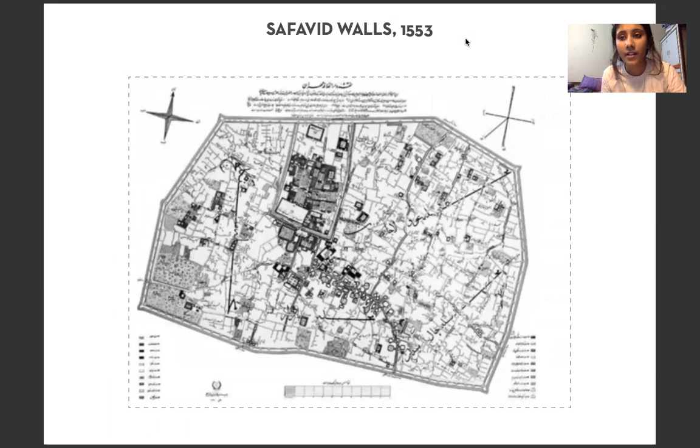Beginning with the Safavid walls of the 1500s, here the birth of the city took place, and it formed a medieval urban form kind of scenario, as we can see in the plan.

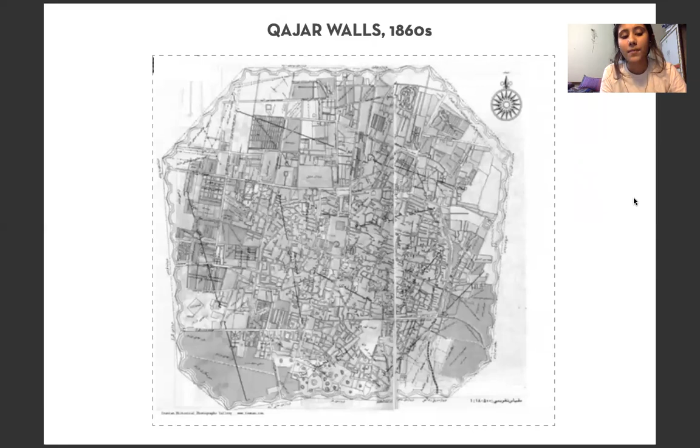Moving on to the Qajar walls, this was the time the expansion of the city took place from all sides. This began the formation of new wide streets and geometrical walls.

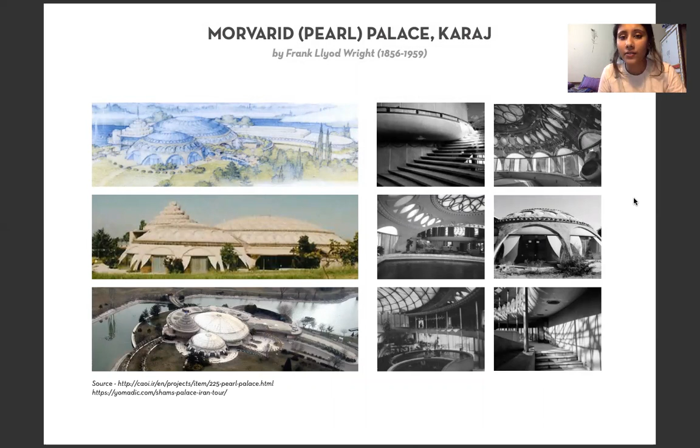The Morvarid, or Pearl Palace, in Karaj was made by Frank Lloyd Wright and is a classic example of contemporary architecture in Tehran. Following that, the Villa Namazee was made by a very famous Italian architect of that time, Giovanni Ponti, along with Fausto Melotti and Paolo De Poli.

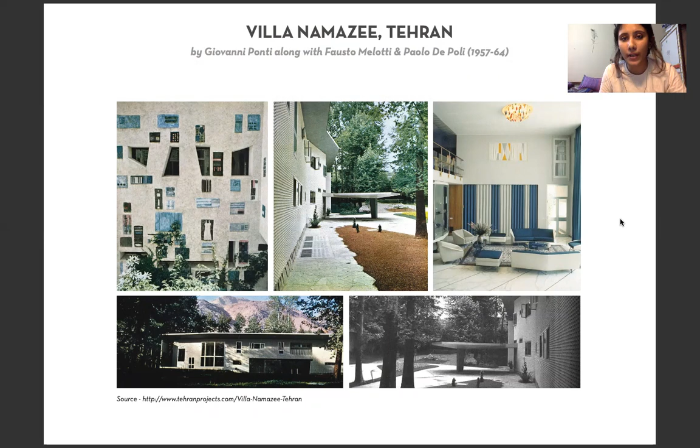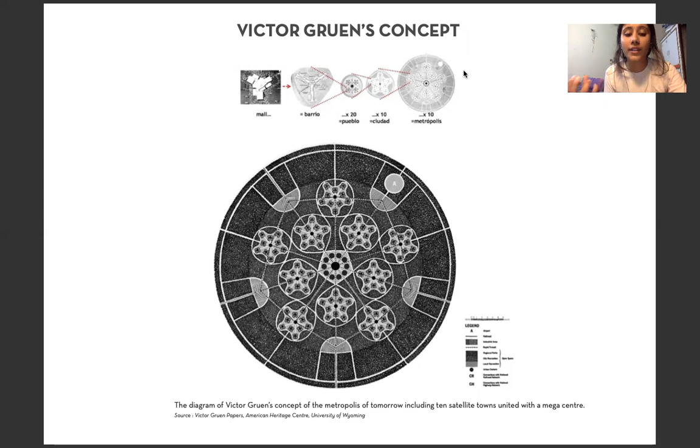Victor Gruen's concept. In 1964, the members of Plan Organization approached Farmanfarmaian and Victor Gruen to make a comprehensive plan, the first ever comprehensive plan for Tehran. As we know, Gruen is an Austrian American planner known as the father of shopping malls. His concept for Tehran's plan emerged from the same idea, from a shopping mall to a metropolis. The process was very similar to American post-war planning debates, which focused on resolving urban problems through decentralization and reorganization of the living space. These are again the 5 alternatives that Gruen and Farmanfarmaian proposed for Tehran's urban pattern.

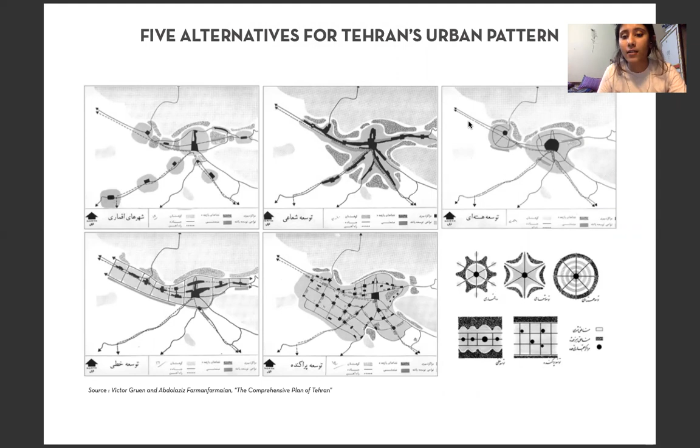Here shown is the diagram of a linear urban structure which was proposed. The series shows different centers to reorient growth and reorder social structures in a linear pattern to reduce the density of the city center. As we saw in the previous plans, the city center was very dense, and urban population was concentrated in a specific center. So this linear structure was proposed so that the city can grow on all sides.

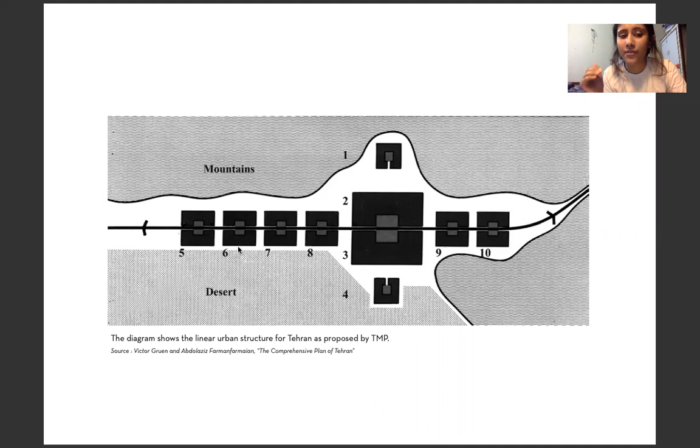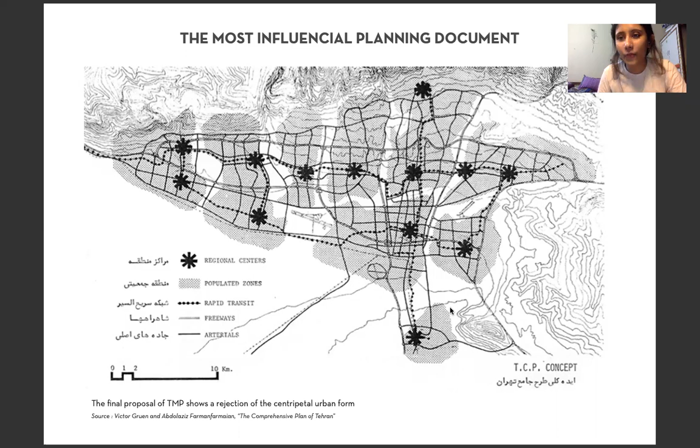However, the final plan, which was fixed upon, was an amalgamation of the first and the fifth plan, and this is also known as the most influential planning document in the history of Tehran.

Here you can see the final master plan, proposed by Victor Gruen and Farmanfarmaian in 1968. It has over 150 kilometers of highway proposed, which enabled the growth of the city towards the west, along with the other sides as well. This majorly depended on private automobiles, which were considered the primary mode of transport. Hence, this would ultimately result in transforming Tehran into a complete car-centric city.

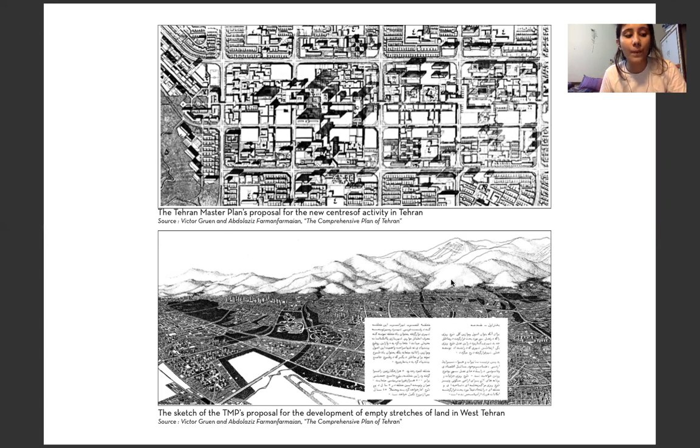The two images here show the vision of how the architects and planners imagined the city to grow. The optimism and utopian vision of Gruen and Farmanfarmaian to produce the ideal city for modern living and modern transportation somehow had a significant impact on the plan. Tehran's comprehensive plan envisioned a city for the middle and upper class people, with no poor population.

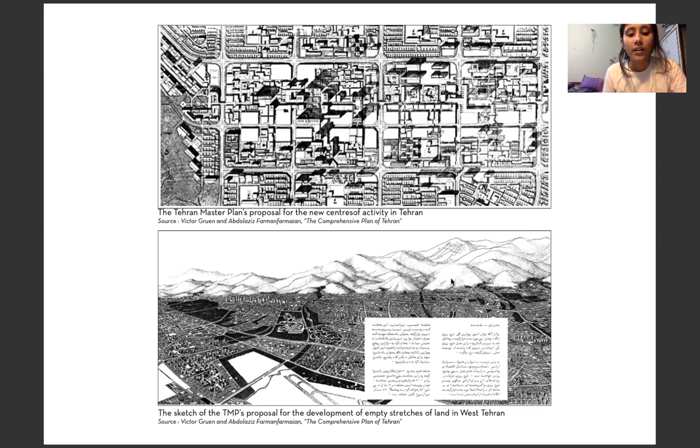The modernist imagery. This is a very strong image, showing how Victor Gruen's whole master plan was overimposed on the old urban fabric of the city. The top left black and white image is the earlier plan of the city, how it was, and this is how the city grew. There were major highways, with the city majorly linked by highways all around, and along with the highways, residential high-rise apartments alongside it. This was a complete modernist approach to transform the city of Tehran at that time.

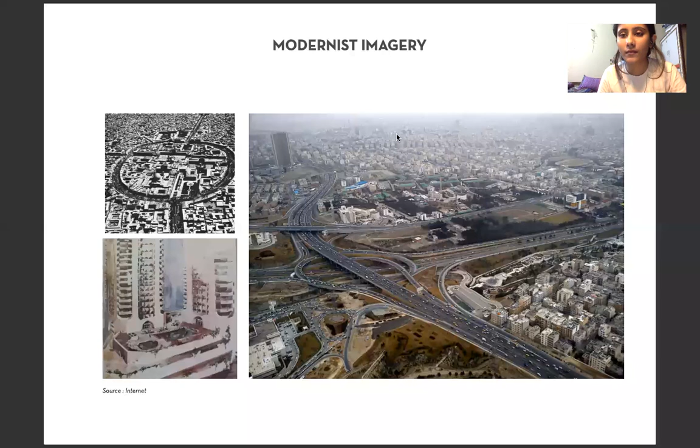So this is another master plan by a very famous planner called Doxiadis, proposed in 1972, called the Tehran Action Plan. However, this never got implemented due to political agendas, one of the reasons being that the then state prime minister did not like the plan. So it remained as the Tehran Action Plan, made by Doxiadis.

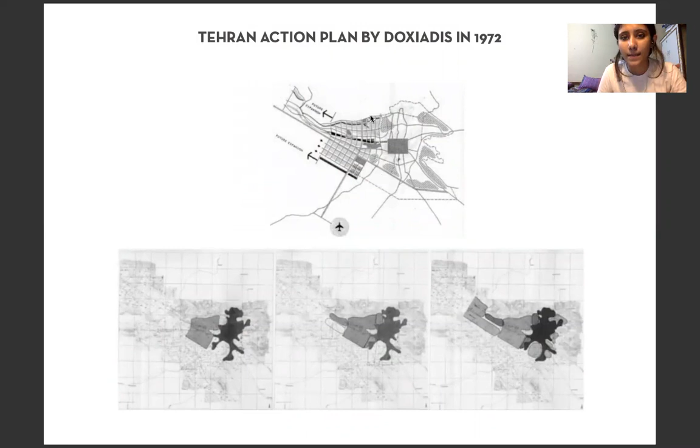In 1992, the plan organization came up with another 5-year master plan for the city of Tehran. However, the state did not approve of this. Therefore, the state themselves came up with a new strategic plan, Tehran 80, which was the first non-physical plan of Tehran. This majorly focused on some specific goals and strategies to solve, therefore linking 22 districts of Tehran.

As we can see, there are different divisions made, which are the 22 different districts which Tehran had at that time. This linked all of them together to make a larger master plan, hence called the strategic plan. So we saw a whole shift from the comprehensive method of planning to the strategic method of planning, which over time developed in the city.

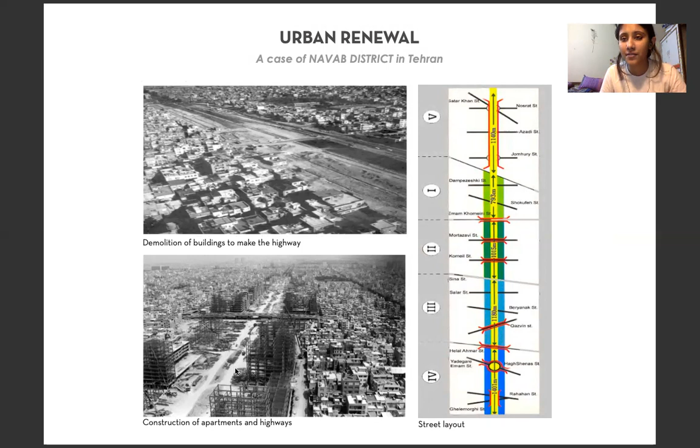As we talked about in the brief, there was a massive urban renewal project carried out in the district of Tehran. There was a whole north-south trading axis, a trading highway, being built right through the heart of the city, the heart of the Navab district. Navab was already a whole urban form, and it was being torn apart by demolition to make highways and residential buildings. These are the images of the demolition and construction process, showing how it took place in the city.

As we can see, the top right image is the built-up corridor, showing how it looked like after it got built up. There were several critiques about this particular method and approach of planning.

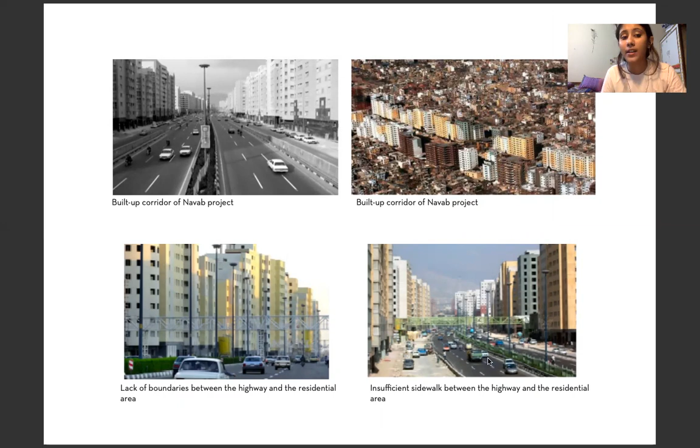There was a lack of boundaries between the highway and residential areas, and a lack of sidewalks. This method of planning gave birth to insecure places between the buildings where illegal things could happen and used to happen. There were also insufficient neighborhood spaces, unoccupied shops, and deserted spaces which were left behind by the planning approach.

The entire old fabric was worn out, and this regeneration project is one of its kind, because it was never implemented again in any other city—it was considered one of the major failures of a planning approach carried out in the Navab district.

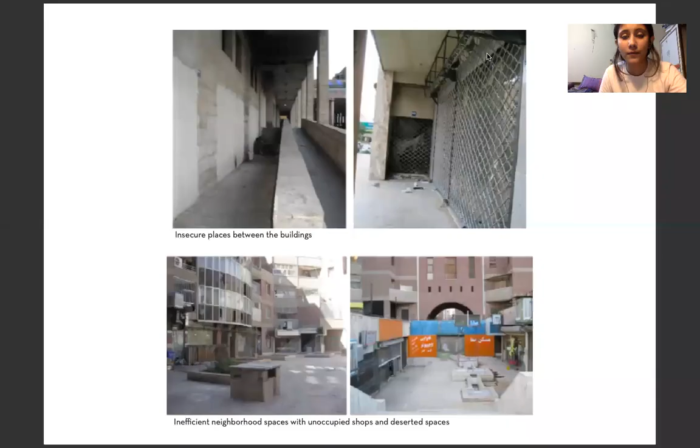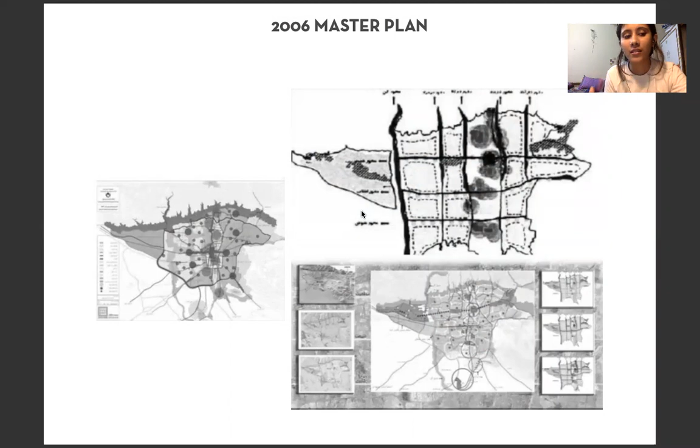Then in 2006, another plan comes in, sitting on top of existing plans. But again, this did not get implemented, because it again had a strategy of linking all the districts together. By then, all the districts already had their master plan from the strategic plan the state had come up with. So this stayed as just another strategic master plan of the city and never really moved further.

Through the whole process, what we saw in Tehran was a major top-down and rational treatment made by the planners to solve the urban problems of the city. They completely dismissed the dominant presence of different groups, and instead set up an ambitious, modernist, and functional master plan with a very limited conception of public interest. They wanted to implement utopic ideas on the ground without even addressing the real urban problems, resulting in a very forceful kind of planning overimposed on the historic old fabric of Tehran.

So that's how the journey of Tehran was. It went through a complete transformation from a medieval urban form to becoming a modern city. Thank you.